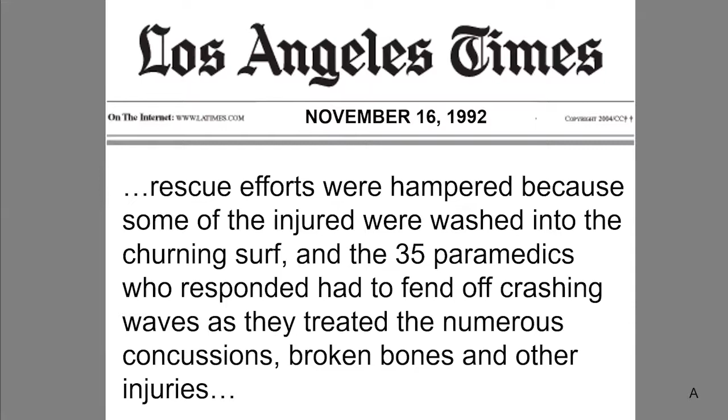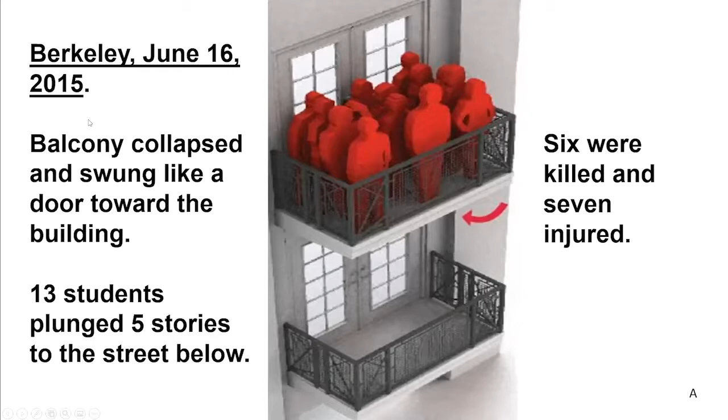Then there was a second incident in Berkeley in 2015 where a balcony collapsed. There were 13 individuals, students, on that balcony, and the balcony swung down and pitched all 13 of them 5 stories to the street below. 6 of them were killed and the other 7 were injured. This is the remains of the balcony.

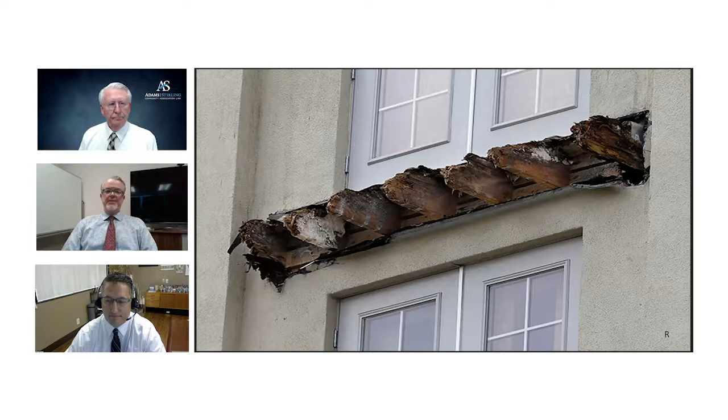And Robert, will you talk about what you see here? Yeah, this is actually the remains of the balcony from that accident that Governor Newsom and others took action on. This shows the decay of horizontal members. Understand, this building is not that old, this is not an old building. But you can see the breakaway occurred not at the point of connection, but actually through the structural members themselves. It compelled the state, legislatures, and other members in life safety issues to regulate and require inspection of these items.

In fact, there was a bill submitted that was quite draconian, went through the legislature, and was defeated. Then the following year, last year, CAI introduced their own bill to deal with balcony inspections. It was a little bit more reasonable in their approach on how to handle them. It deals with all exterior structural elements involved with condominiums, so this is not planned developments, but condominiums only.

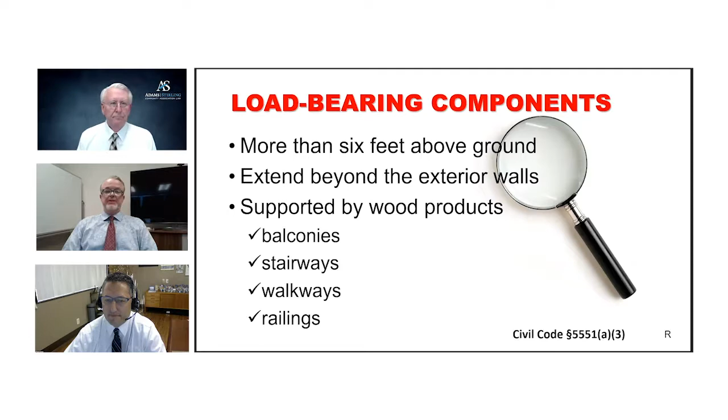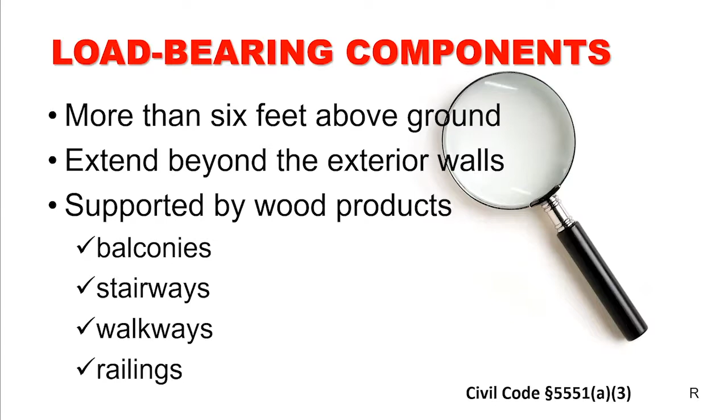So Robert, what is it that they're inspecting? The bill requires any life safety issue and structural issue of wood frame buildings more than 6 feet above grade to be inspected. Balconies, decks, elevated walkways, staircases, railings, anything exposed to weather conditions that involve weatherproofing and wood structures that could cause injury to occupants or residents.

Okay, and Sean, from a reserve analyst point of view, what would you be looking at on these balconies? So we would definitely include the railings, as Robert indicated, for inspection. And then depending on the CC&Rs, we may also include the waterproofing of the decking membrane for reserve funding.

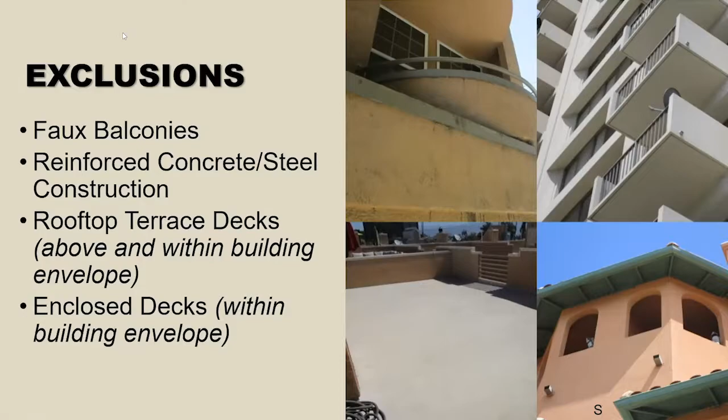Okay, let's look at waterproofing. The statute does state in the language of the statute itself that the part of the inspection is the waterproofing elements, the flashings, the membranes, coatings, and sealants.

Then the question comes up is who's responsible for all of these sealants, especially in dealing with balconies. I can tell you it's a constant problem that we deal with, in that board members think the owners are responsible, the owners think that the association is responsible, and in reality, in most cases, it's the association.

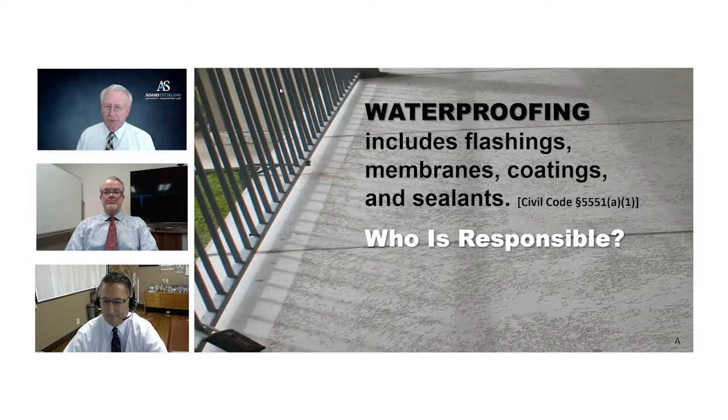So unless the documents specifically state otherwise, and this is also in addition to the Davis-Stirling Act, it states that balconies are exclusive use common area, and unless the CC&Rs state otherwise, owners are responsible for maintaining the balcony decks, but the association is responsible for repairing and replacing them.

So the question comes up, what does that mean, that the owners are responsible for maintaining them? The consensus seems to be that they sweep them and keep them clean. When it comes time to repairing them, replacing those waterproofing elements, the association is going to be responsible unless the CC&Rs specifically state otherwise.

Okay, so Robert, tell us about the inspection process. How do you guys handle it? Do you use an architect or a structural engineer?

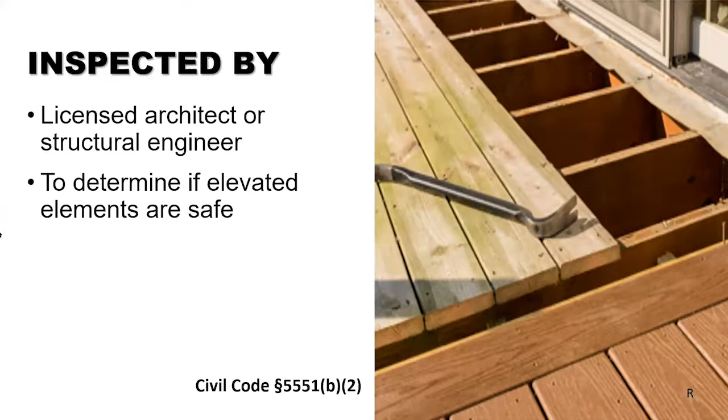To all my friends from architecture school, I have great respect for architects' ability to look at waterproofing, but for the structural issues and wood framed elements, even though our firm has both structural engineers and architects, we only use structural engineers for this work. We do that because follow-up conversations and issues confronted if problems are found are much easier addressed with a structural engineer on hand. We also like the final documentation and stamps on closeout documents to be from a California licensed structural engineer.

The whole point of the bill is to determine if these elevated structures are safe, so we don't have problems of balconies collapsing and people being injured or killed. So one of the things they're looking at is a significant sample.

So from your perspective, what is a statistically significant sample? Since it says you have to have 95% confidence, does that mean if you have 100 balconies, you have to inspect 95 of them?

Not necessarily. The 95% confidence factor is arguably the most confusing part of this regulation and causes the most conversation and concern by clients, HOAs, and property managers. How do we determine 95% confidence?

Well, what we do is have a statistician produce a calculation formula for us. The reason for the 95% confidence factor is it allows the structural engineer, architects, and other knowledgeable people to look at a building and take a common sense approach to some items.

For example, if a building was built in 1968, your confidence is different than if it was built 4 years ago. If a building was built in Rancho Santa Margarita or an inland area with dry conditions, it's different than coastal areas and wetter areas like Corona del Mar or Santa Monica.

So we take into account the physical conditions of the location, but we also look at which balconies face north or south, exposure to sun, so we can use good building knowledge and common sense to help define confidence. But yet again, it's a complex conversation and decision to make, and one that leads to a lot of concern by HOA board members and property managers.

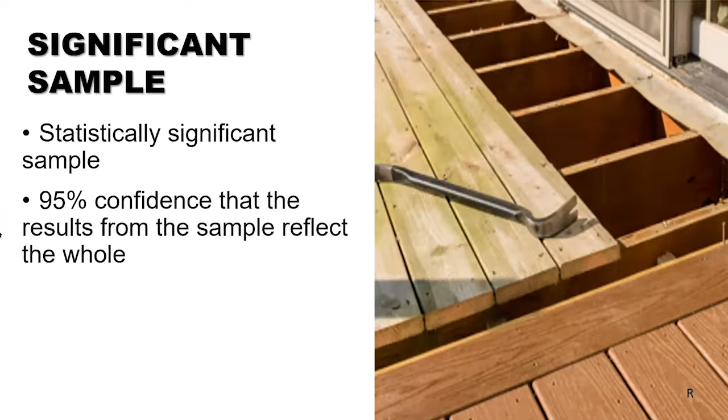We do everything we can to make sure we have the highest level of confidence. So in some cases, the 95% confidence would mean inspecting 95 decks. In other cases, it would be 60-some decks out of 100, for example.

Okay, well then the next question for a lot of boards is how do you go about doing the inspection itself? Robert? The first thing we do is go out and make a visual observation of the building to get general information about its history and condition.

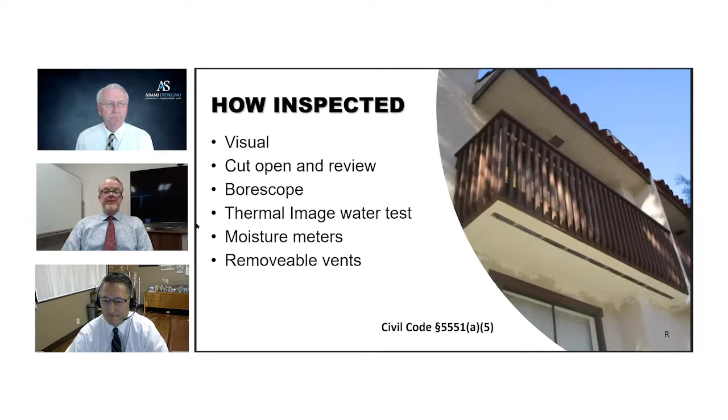Once that's occurred, we engage a structural engineer, one of our team members, and start talking about the different steps necessary to inspect the balcony and the materials it's made of, how to approach it, and we run internally a 95% confidence factor statement.

We start by cutting open generally the underside of decks when we're able to get access to them, and most of the time we are. We open up a deck from below so we can inspect the lumber and any intrusion of water that may be visible. This way we're not damaging the waterproofing from above.

We can and do use bore scopes. We've had engineers use a moisture meter to understand moisture content in the wood itself.

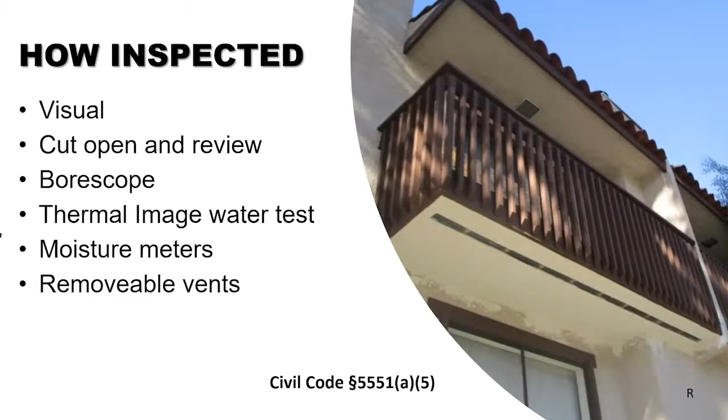And we do advise replacing some of these openings we cut with vents. These small vents can in the future be removed and opened up to see inside for future inspection, so you don't have to do destructive testing at future dates. It also allows the wood to breathe and moisture to vent out, which is the issue that causes a lot of this damage to begin with. So we like including removable vents in all of our projects.

Okay, when you do these inspections, do you ever find problems with any of the decking? This is an example of problems we found. This was not an SB 326 inspection for the photographs you see here, but this is work we've done.

We were made aware that the upper left-hand photo shows the railing connection on the deck, and it shows some possible moisture issues with discoloration. When we started opening up this deck and these decks, we found significant water damage in the structural elements. The upper right-hand photo is actually the bolts, the connecting bolts of a cantilever deck onto the building itself.

And I want to draw attention, this building is not 10 years old. So this damage was done within 10 years.

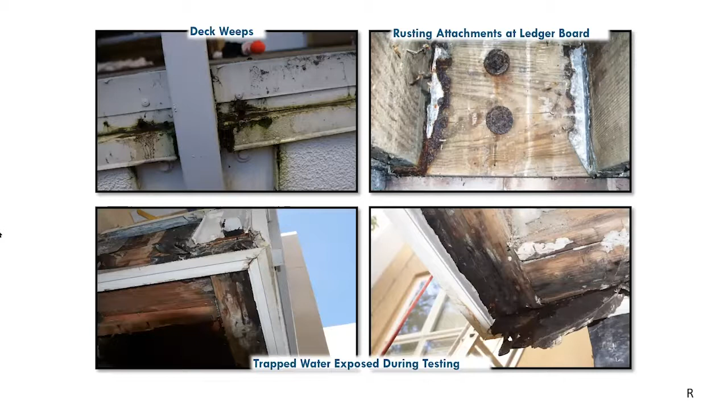They used this information to get the developer to respond. If you go to the next set of images, you've got some more here. This is the same building—you can see the type and level of damage, and how fast it occurs when waterproofing is not correctly applied.

In the upper left-hand photo, you'll see those wood members. Those were actually shoring members put in place to maintain safety. We didn't want those decks to do anything other than stay in place until repairs could be made. So this is an example of what the state and regulators are trying to avoid.

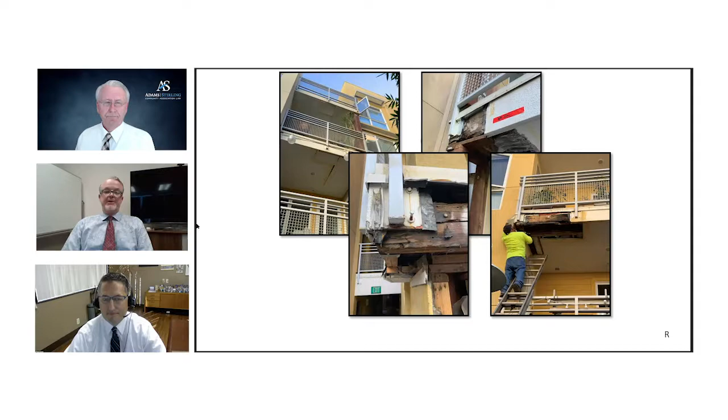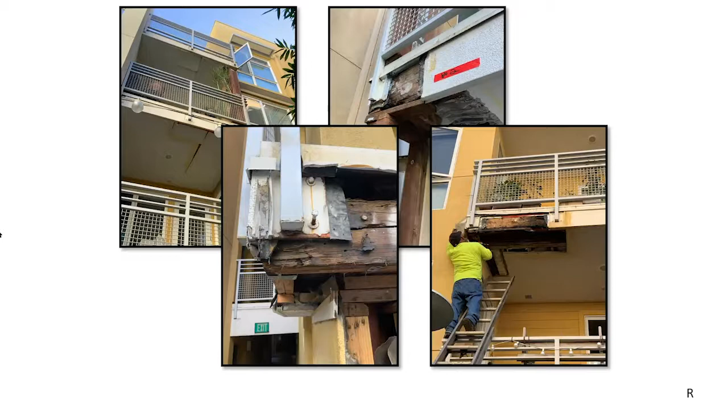And you said this project was less than 10 years old. Exactly, and that's important to say. Any properties that property managers or board members are affiliated with that are at or less than 10 years old should be inspected as quickly as possible. The reason for that is there's a statute of limitations on what developers are obligated to pay for, and it'd be unfortunate to wait to do an SB 326 inspection only to find out you'd missed the required timelines to hold the developer accountable.

Okay, let's look at the process involved. Can you describe it, please? Our process is a two-step process, as the board, the HOA, and the property managers would see it. The first step is the general engineering phase. In this step, our structural engineer would include a cost or fee for the entire project, all the way through to the final documentation and paperwork. So it's a fixed fee amount.

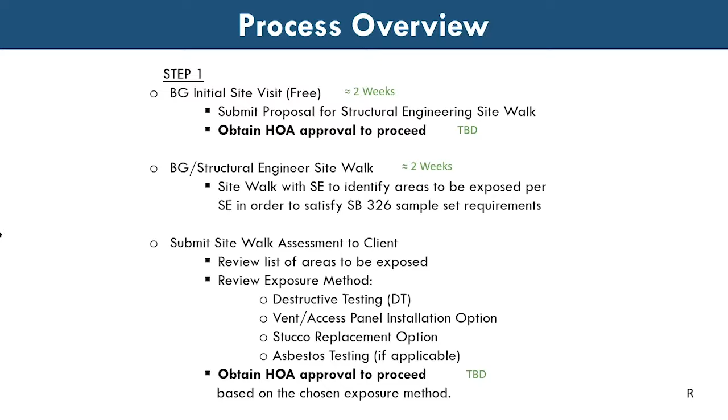In this step, an assessment would be made of the 95% confidence factor, and we would move into destructive testing. So step one, the HOA would approve the engineering, and step two, the HOA would approve the required destructive testing. How many decks are opened up?

Like those photographs we saw before, we did 68% of the decks in that inspection. Sometimes it's 95%, sometimes it could be 50% of the decks inspected with a structural engineer. In that case, we would go to the board, the property manager, the HOA and say, this is the cost to address that number of decks.

So the number of decks might depend on what you find. If they're in pristine condition, you don't need to inspect as many, but if you find a lot of damage, then you'll be inspecting more of them.

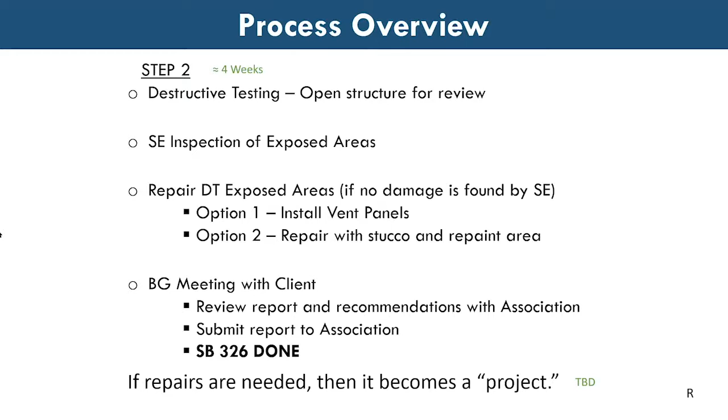Once we start the destructive testing, if we find little to no damage, that helps guide our approach as we move through the facade of the building to different decks. If we find questionable damage and waterproofing issues, we will be more aggressive in our destructive testing. That's why it's important for us to treat this as a two-step project and keep the board and property manager informed, so people can understand how this is evolving from a cost factor.

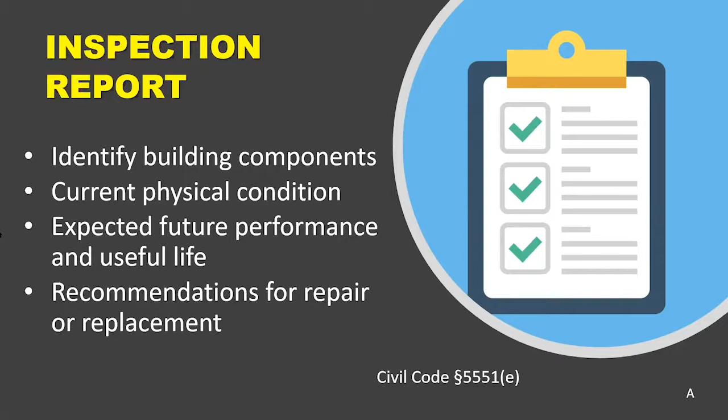One of the things required under SB 326 is that the company doing the inspection must prepare an inspection report. In that report, they identify the building components, the physical condition of those components, and the expected future performance and useful life of those components, then make recommendations for repair and replacement. This is something you'd want to do in conjunction with the reserve analyst as well, because it's going to impact the reserve study.

According to the statute, if you find an immediate threat to health or safety, the report has to be given to the association immediately. They have to report to the local code enforcement within 15 days. That would likely be the building department, Robert? Yes, the building department would be the most likely agency. Correct. And then take corrective action—the board would have to authorize taking that corrective action. This is where financing and reserves come into play.

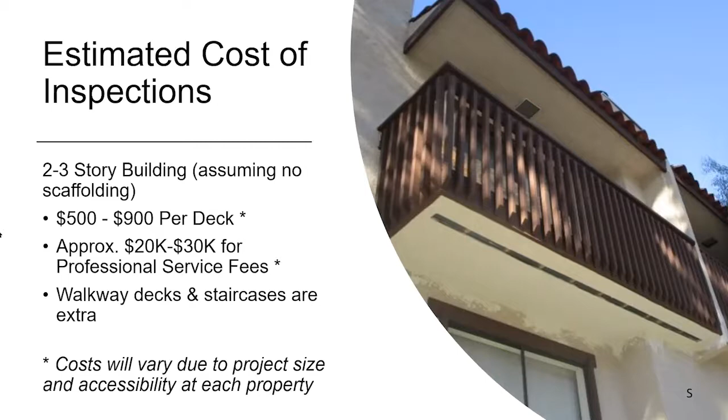The next question is, how do you account for it? Next slide, please. The question is, can these inspections be funded for on your reserve study? The process that your reserve study provider goes through is called a 4-part test, established by national reserve study standards.

For any project to be included on your reserve study, it has to be association responsibility — structural load-bearing components are always association responsibility. It has to have a limited useful life expectancy; these inspections are required every 9 years, so that is set in stone. It has to have a predictable useful life expectancy; the first round of inspections is due by January 1st, 2025. And it has to have a minimum threshold cost of 0.5% of your annual budget.

And so clearly the cost of these inspections would meet that criteria. So yes, inspections should be added to your reserve study — they pass the 4-part test with flying colors.

To emphasize again what you just said, these need to be completed — the first round of testing by January 1, 2025, and then in 9-year increments. Now, the 9-year increments, can those be somehow coordinated with the reserve studies? Yes, and especially if you only conduct reserve studies every 3 years to meet that site inspection requirement, you want to coordinate these two inspections together to make sure it gets accounted for on your reserve study.

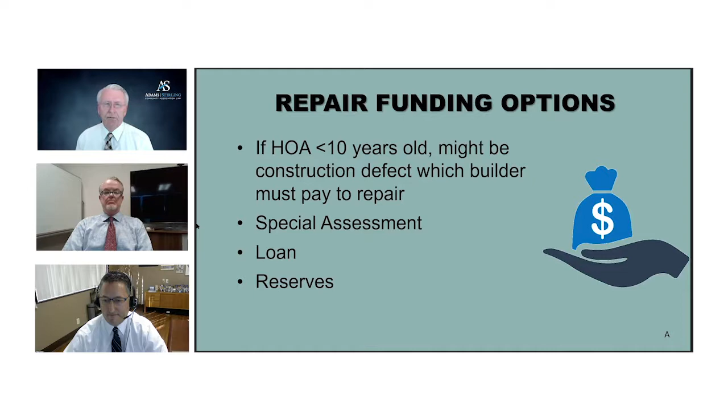And if the association is less than 10 years old, I think, Robert, you had pointed out — or Sean — that you might be able to then go against the developer, because there's that 10-year statute of limitations, actually a statute of repose, that cuts you off after 10 years from being able to go after the developer if the damage is due to construction defects.

The other things you're looking at, once you get past that 10-year statute, is you'll probably have to do a special assessment in order to repair the damage. It might be that the assessment is small enough that you don't need to get a loan. If it's quite large, then you'll probably be looking at going to a bank to get a loan.

And then, Sean, another question that comes up: can they actually borrow from reserves? Yes, indeed, and especially if it's an immediate safety threat, the priority is safety and getting it addressed immediately as the law lays out. So you can borrow from reserves with the understanding that you will need to repay it within 12 months, but the beauty of that option is it buys you time to figure out the repayment rather than letting a safety issue linger.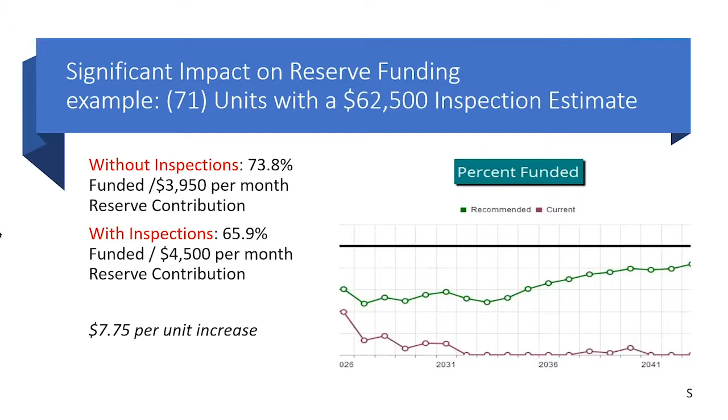Before these inspections were added to the reserve study, they were 73.8% funded. Being above 70% funded indicates that you have strong reserves. The recommended monthly reserve contribution was $3,950. By adding this one inspection line item to the reserve study, the percent funded decreased to 65.9%, and the recommended monthly reserve contribution bumped up to $4,500. This comes out to a $7.75 per unit increase. Keep in mind that this is based on the tighter remaining useful life window of a 2024 target.

In future years, you'll have all 9 years to spread out the cost and fund accordingly. But do expect a significant bump to your reserve contribution in the near term due to this one line item exclusively. Unfortunately, in some situations, we've had to recommend special assessments up front, and that's just to do the inspection.

Okay, Sean, what about this one? So one of the benefits of this law, other than safety, is these inspections and these reports can be used to sharpen your reserve study assumptions. So keep your reserve study provider in the loop. We should be part of the team, so when you obtain inspection estimates, share those with your reserve specialists, and we'll craft a funding plan accordingly.

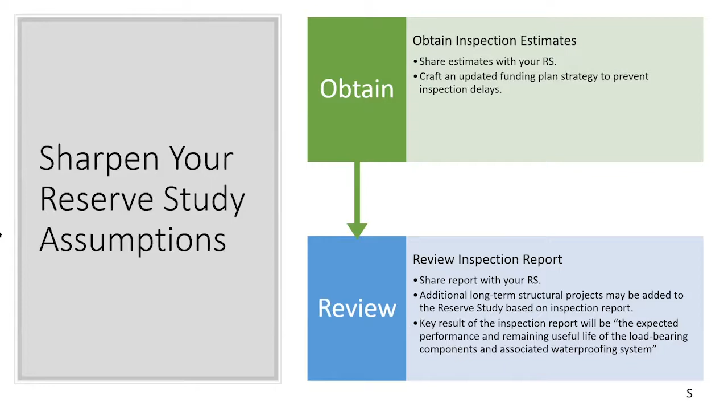So you should be able to complete these inspections on time without delay. When you receive the inspector's report, a critical component will be the expected performance and remaining useful life of the load-bearing system. So there may be additional load-bearing components now that we can add to reserve studies, which usually were excluded in years past because we had no way to evaluate the conditions of that type of infrastructure. So definitely add those line items to your reserve study. Start funding sooner, because these inspection reports will greatly enhance your reserve study and enable them to be a wise investment.

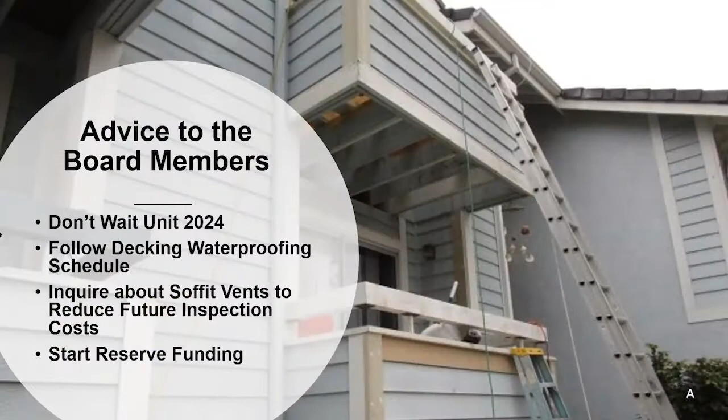Okay, let's do a summary here. As Sean pointed out, you don't want to wait until 2024. The report is due by January 1, 2025, so you've got between now and the end of 2024 to get this done. As he pointed out, you want to do it sooner because it'll be less expensive to make repairs now if you discover they need to be made than doing them 3 years from now.

And you want to follow the decking waterproofing schedule. This is probably one of the bigger elements that gets neglected, and it's the one thing that's going to keep your costs down, because you want to keep the moisture out of those structural members. Inquire about soffit vents to reduce future inspection costs, as Robert talked about. Putting in those soffit vents is important for getting air in there and for future inspections, so it's less expensive to go in at a later date and inspect again.

Start your reserve funding now, so you've got the money set aside for these inspections. Once the inspections are done, you can look at whether repairs can be planned for a future date, or if immediate, do them now. So boards of directors and managers should work with their reserve analysts, like Sean's company, to make sure these things are built into reserves, and with an inspection company such as Robert's, to line them up in advance. As Sean pointed out, there's going to be a crunch, and it'll be difficult to get people in to do these inspections. So you're better off getting started now, contacting the companies that will do the inspection, and starting the process. Robert, how long does it typically take to go through these kinds of inspections?